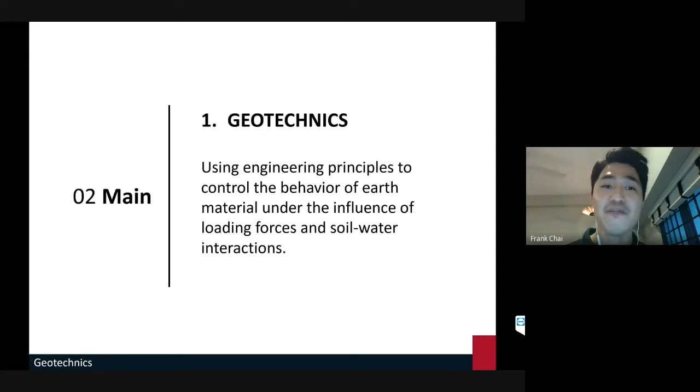So we will be covering mainly 3 topics today: geotechnics, monitoring, and surveying. Briefly, geotechnics can be defined as using engineering principles to control the behaviors of earth materials under the influence of loading forces and soil-water interactions.

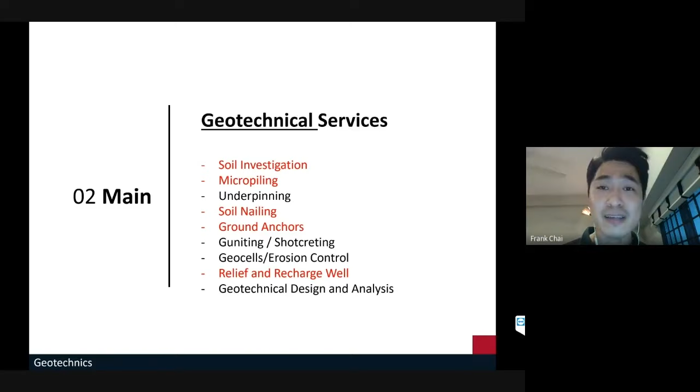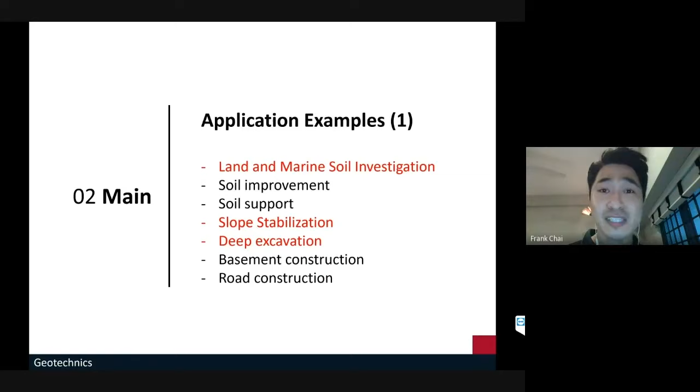At Ryobi G, we cater for all sorts of geotechnic solutions for our clients. Some popular ones are soil investigation works, micropiling, soil nailing, ground anchors, relief and recharge wells, and the list goes on. Application examples include land and marine soil investigation, slope stabilization, deep excavation, and rock reinforcement, etc. Now I will go through some of these application examples in more detail.

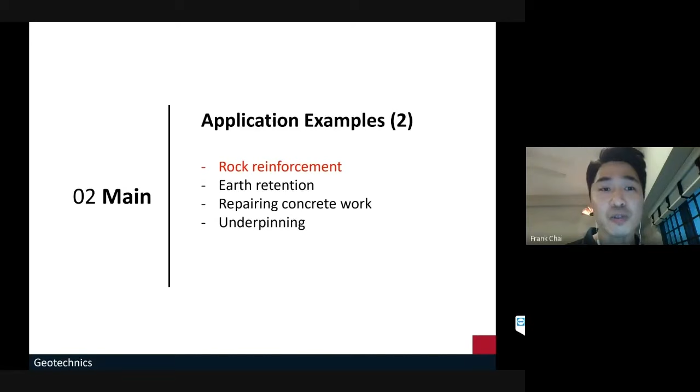We all know Singapore Changi Airport is one of the busiest airports in the world, serving approximately 60 million passengers every year. Carrying out operations within CAG airside is tedious and challenging. I'd like to share one of our completed projects, awarded by Changi Airport Group and Arup Singapore, to carry out preliminary works for the future Terminal 5 development.

We conducted soil investigation works and cone penetration tests. These tests were done within the airside under strict conditions: strict working hours, stringent aerodrome requirements, and airside requirements. This compliance had to be met at all times for the project to be carried out smoothly without disruption to the existing logistics and aircraft maneuvering around Changi Airport aerodromes.

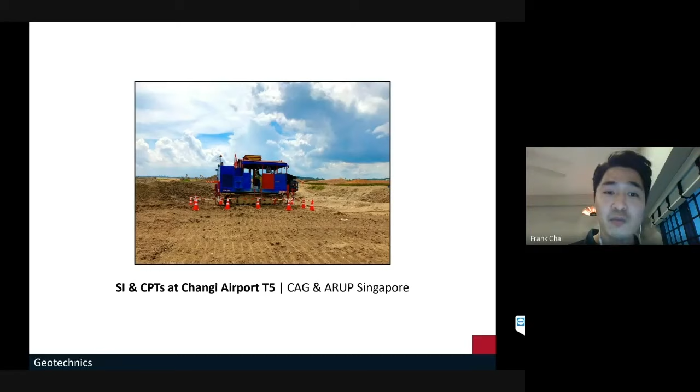I'd also like to share another project: we were awarded a soil investigation project at Golden Shoe Car Park at Market Street by CapitaLand. A normal standard drilling rig height is approximately 5.8 meters, and given the height limit within the car park, there's no way a standard rig could fit into a lower headroom site condition. Nothing to be concerned about—we have a ready short drilling rig for the soil investigation works to be carried out.

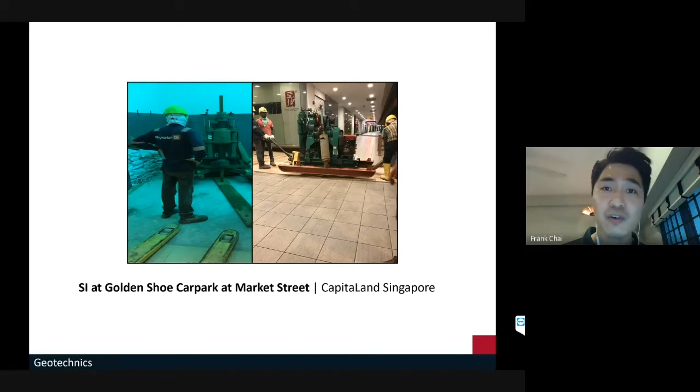Now, what happens to all the soil and rock samples obtained from these sites? They are delivered to our own laboratory for further testing of soil and rock samples from our soil investigation works. Currently, my company has approximately 52 drilling rig machines and 2 sets of cone penetration test rigs to conduct soil investigation works. So whether it's project volume or difficult site conditions, nothing to be concerned about.

We have all the professionals, resources, and laboratory ready to meet your timeline.

Other than soil investigation work, I would also like to share one of our awarded projects by Sembcorp Design and Construction to construct slope and cliff stabilization works within Gombak Camp. We managed to carry out subsoil pipe works, shotcreting works, and more than 1,000 numbers of soil nail installed on the project sites.

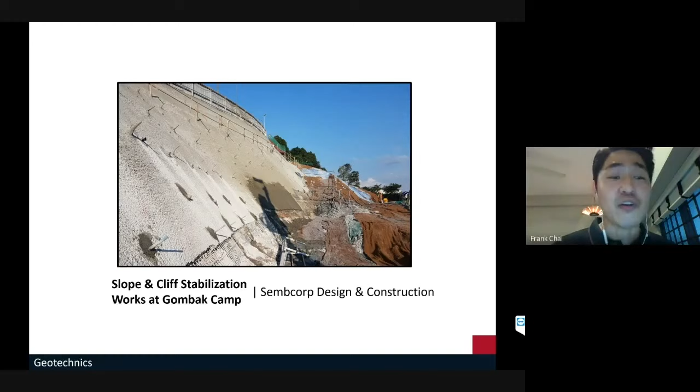Now, we also know that Singapore Land Transport Authority have also been actively constructing underground MRT tunnels for the residents to maneuver around Singapore. We have been given the opportunity to carry out installation of soil nail, micropiles, ground anchors, and shotcreting works by China Jingye Engineering Corporation at Bedok South Station and Tunnel for Thomson East Coast Line.

For this project, we are very proud to say that we are the first contractor in Singapore to install ground anchors using glass fiber reinforced polymer for this project.

Well, that's all from me covering Geotechnics topic. My colleague Reuben will take over for the next few slides. Reuben, over to you. All right, thanks, Frank, for the introduction to Geotechnics.

Right, so for my end, I will cover the remaining two services: monitoring as well as surveying. Now we have quite a bit to get through, as you can see, we have quite a robust number of services. So I'm going to try and briefly touch base on as much as I can.

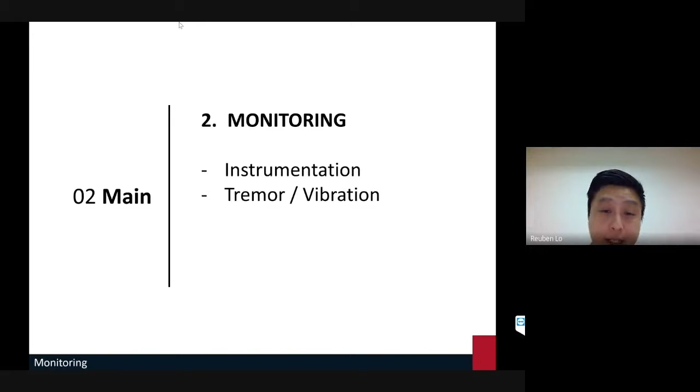Instrumentation monitoring, for those that don't know, we define it basically as using instruments and sensors to manually or electronically, meaning automated, monitor the effects of civil work. That could be the effects of construction, mining, tunneling, that sort of thing.

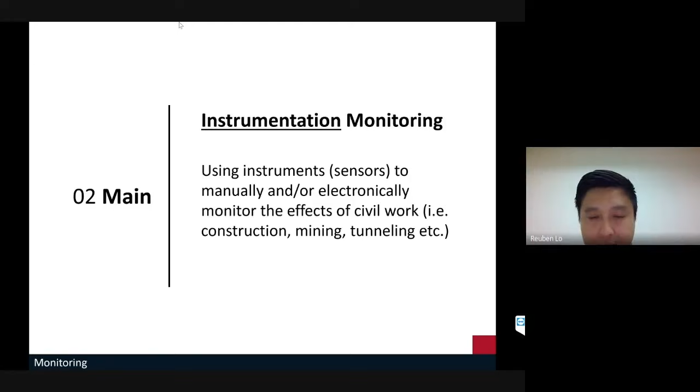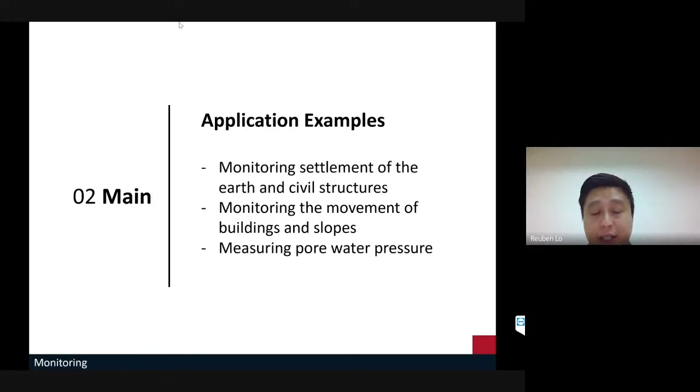Examples of this kind of application being used is monitoring settlements of the earth or civil structures. This can be large towers, bridges, tunnels, monitoring movements of buildings and slopes, or even something as simple as measuring pore water pressure underground.

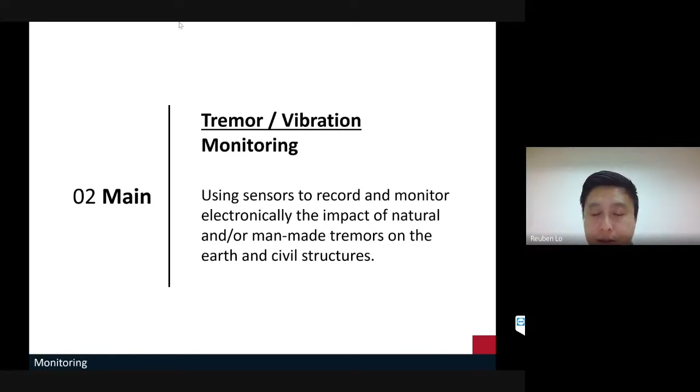Now, in terms of tremor and/or vibration monitoring, this is a bit more specific where we measure, like the title says, tremor or vibrations felt at a particular instance on a particular site. This is done using electronic equipment that measures or rather records real-time data of vibrations being felt. Application examples include measuring or monitoring for vibrations in buildings, infrastructure, as well as earthquake monitoring on land.

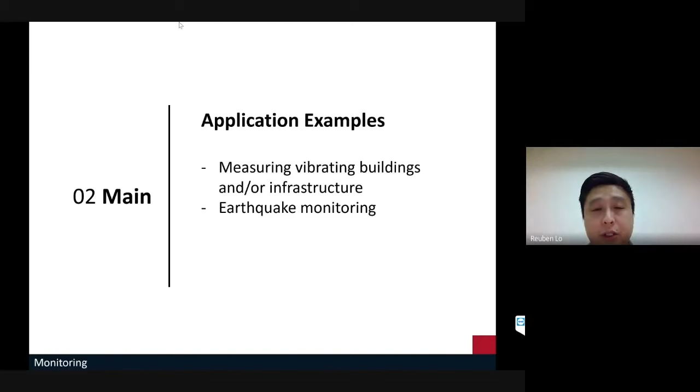An example of the kind of monitoring that we do is in the Singapore MRT stations. In this example, I can't give you anything specific because it is confidential, but rest assured, we have basically done monitoring for every single line on behalf of the Land Transport Authority.

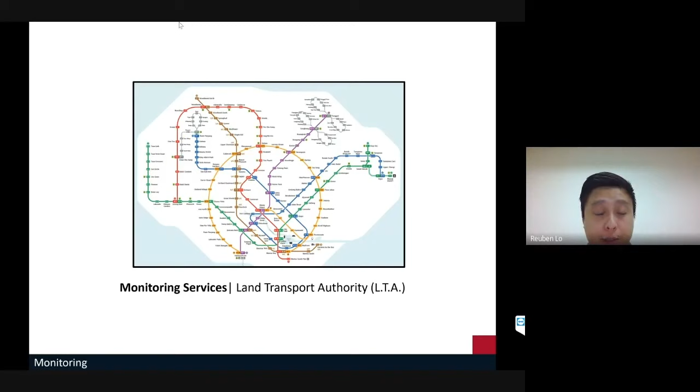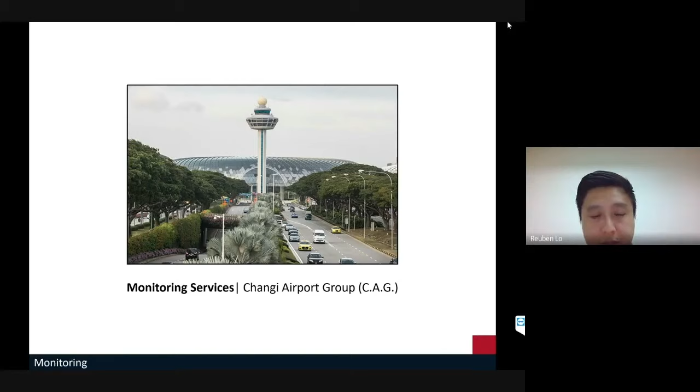Another example is that we also were in charge of monitoring the construction phase for the Jewel Changi project. Now, this was a pretty big case, so there was a lot of monitoring being done underground as well as on the surface, on the structures itself, since it's so near the Changi airport.

Right, so in terms of surveying, we cover three particular services. The first is geophysical, using non-intrusive methods to basically image or measure certain properties in the ground. The second is 3D laser scanning, which we use high-tech lasers to measure and model surfaces. Photogrammetry, similarly to 3D laser scanning, instead of using lasers, we also provide services that use photographs stitched together to create models.

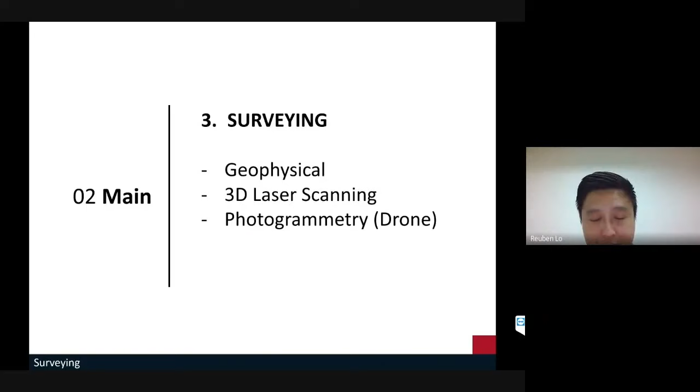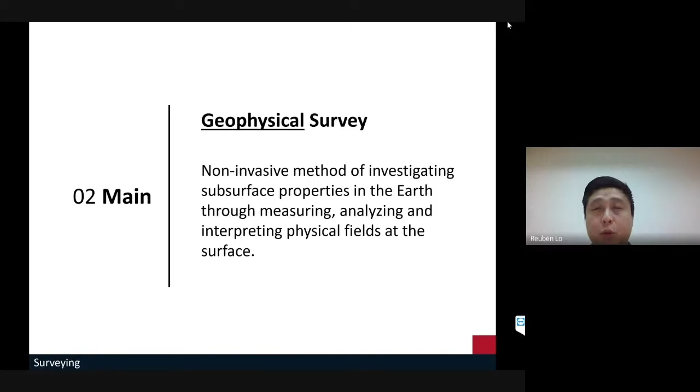Now, this is another explanation for what a geophysical survey is. Like I said before, it's non-invasive methods that we use for particular kinds of surveys that require us to look for certain things in the ground. Examples include mapping underground utilities, cavity detection, pile length detection, mapping of bedrock, etc.

As you can see here in this list, there is a variety of methods that we cover. These are certain examples. If you're interested to know more about them, please let us know. I'm not going to go through it here as it would take too long.

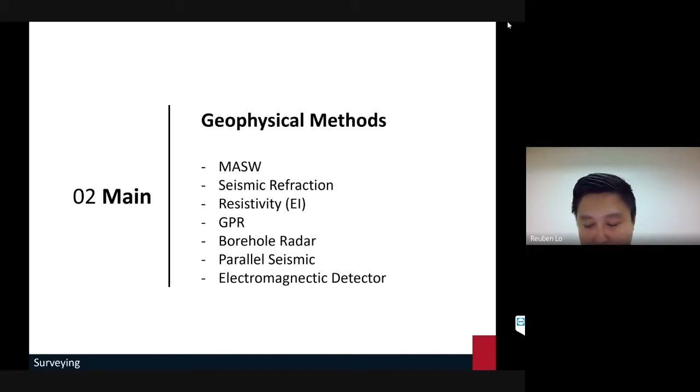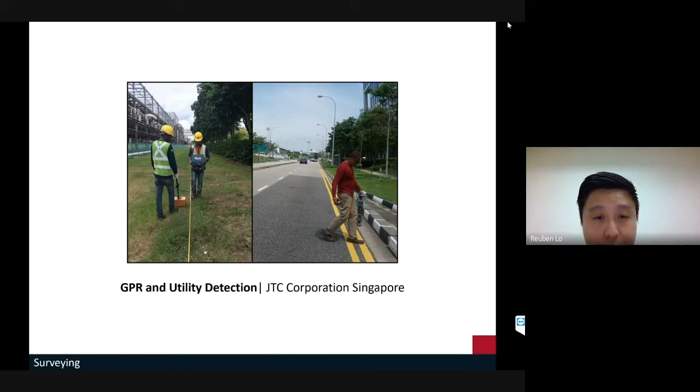An example of the methods that we use, here you can see on the left, we use a GPR, and on the right, a specific utility detection tool as part of our utility detection services. Here is another example of one done in a rural area.

This was done in the nature reserve in Singapore, where we conducted seismic reflection and seismic refraction as needed for the cross-island MRT line. This one was a bit controversial and complicated purely because we were working on a nature reserve. We had to work closely with the government to ensure that everything we did, even every footprint we made on site, did not threaten the ecosystem or cause any permanent damage.

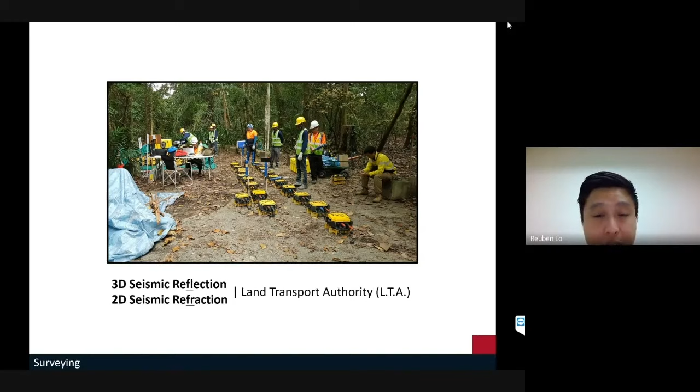Last but not least, here's an example of another survey we did, this time in Malaysia, for the Malaysia MRT, where we conducted both MASW and resistivity surveys. This was done for a particular station. I cannot say which, but yes.

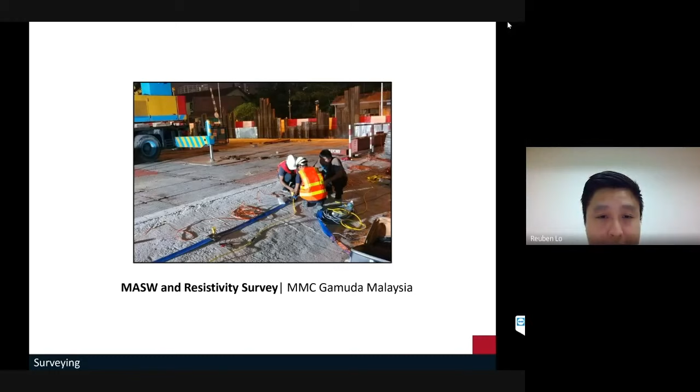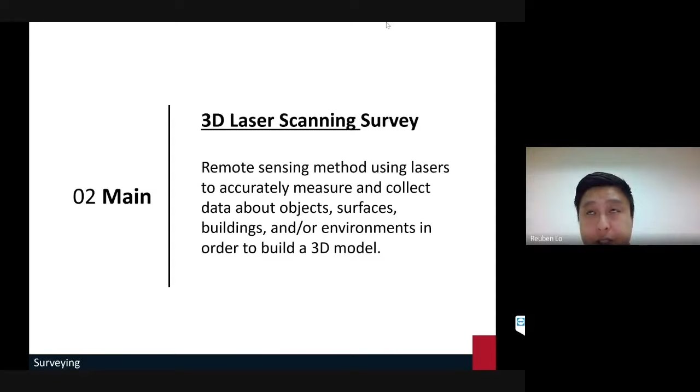Okay, moving on now, we're talking about 3D laser scanning. Like I said previously, this is a method that uses lasers as a remote sensing method to measure or collect data about objects, surfaces, anything of interest that we can build a 3D model of.

In terms of methods, we have two kinds: a static laser scanner, or LiDAR, as well as a kinematic version. The kinematic version is pretty special because it helps us cover large areas. Essentially, we can take the laser scanning apparatus and mount it on a vehicle - a car, a 4x4, truck, rail, even a boat - and take it along to do surveys for large areas.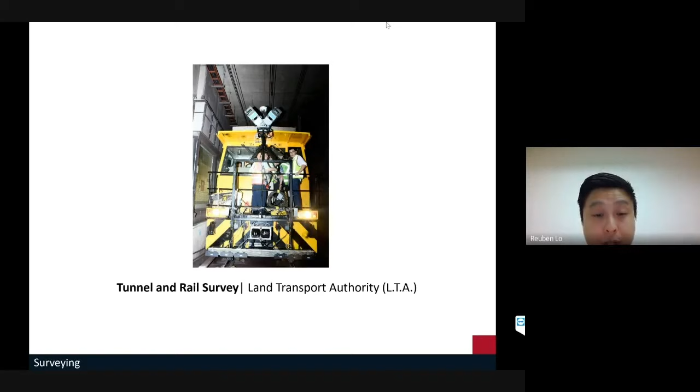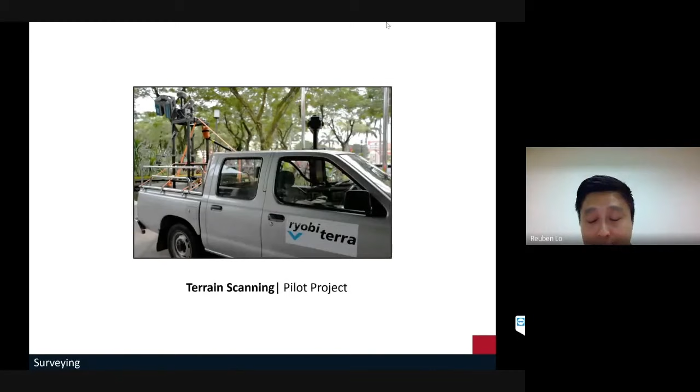Here's an example of one of the test pilot projects we did very early on in Singapore, where we essentially did terrain modeling in and around parts of Singapore as part of a demonstration. You can see here the apparatus is now mounted on a truck, whereas previously it was mounted on a locomotive. So depending on the requirements, we can basically mount it to anything that moves if needed.

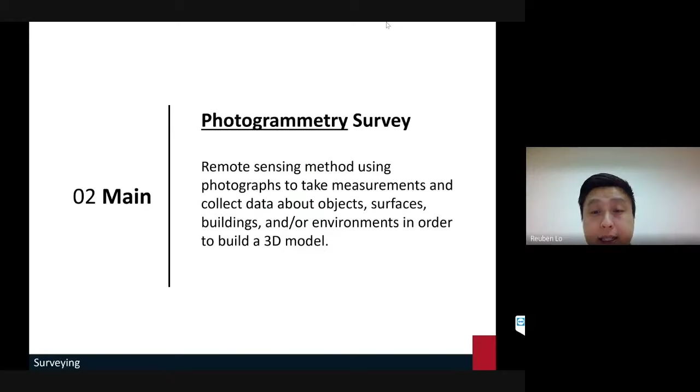Moving on to photogrammetry surveys. Similarly to 3D laser scanning, but instead of using lasers, we use photographs. The way this works is that we use overlapping images to create 3D models. Same kind of application - it can be used to measure and collect data about objects, surfaces, or anything of interest.

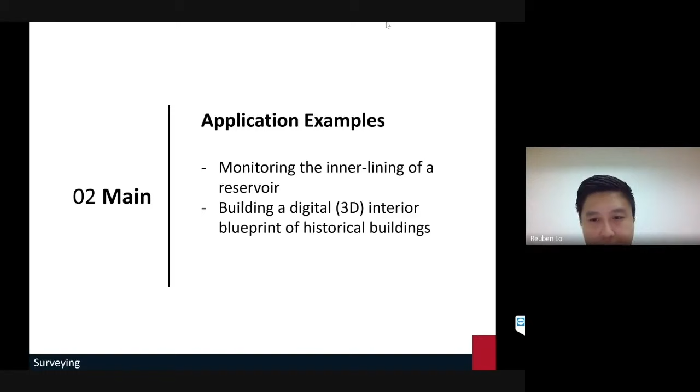Again, we have two kinds of setups or methods: one is static, and the other uses a drone. In terms of applications so far, we have modeled and monitored the inner workings and linings of service reservoirs, as well as built 3D interior blueprints for historical buildings.

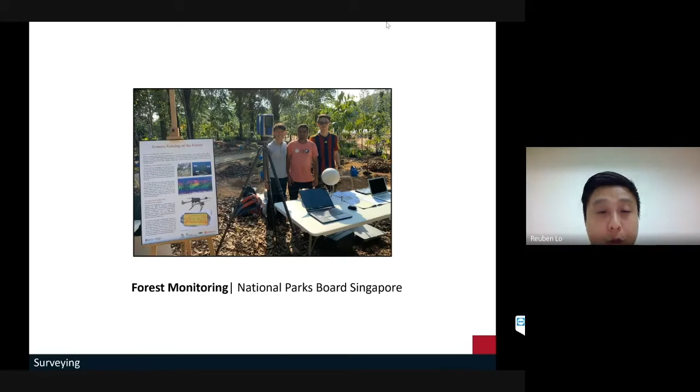An example of us using our photogrammetry is one where we did forest monitoring for the National Parks Board of Singapore, where we took images over time to measure the growth rates of trees in and around the parks. Here's an example of a test flight we also did using the drone, where we actually modeled our old office.

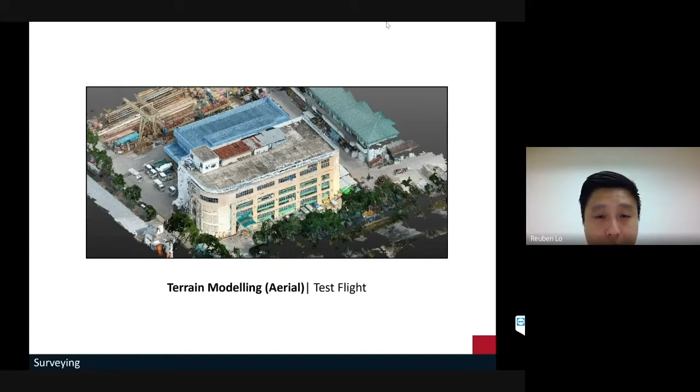Okay, so now we've reached the end of the presentation. I'm sure for all of you there's quite a lot of information to digest from the number of slides we have presented. Never mind, we're not expecting you all to remember everything. But what we would like for you to take away from all of this is these four points.

Number one, in terms of manpower resources, hopefully throughout this presentation you have an understanding of the capabilities of our company. We have a diverse number of resources and methods of services, as well as the manpower to back it up. That's what we want you guys to know.

Secondly, touching on our services again, they're all comprehensive, meaning we are not just there to push buttons. Simply put, we are here to solve a problem. That's what we are there for. That's why we have that many services.

One-stop shop - again, going back to our service capabilities, regardless of the problem you have, as long as you come to us with that problem, chances are we have a solution for you. So whether it is geotechnical monitoring or surveying related, chances are we can do it and we can help you out.

Last but not least, we want to emphasize that regardless of the complexity of the work or the problem itself, we are up for the challenge. We have the capabilities, both technically and manpower-wise, to be able to do it. So yeah, that's it from me, really. Frank, do you want to close up?